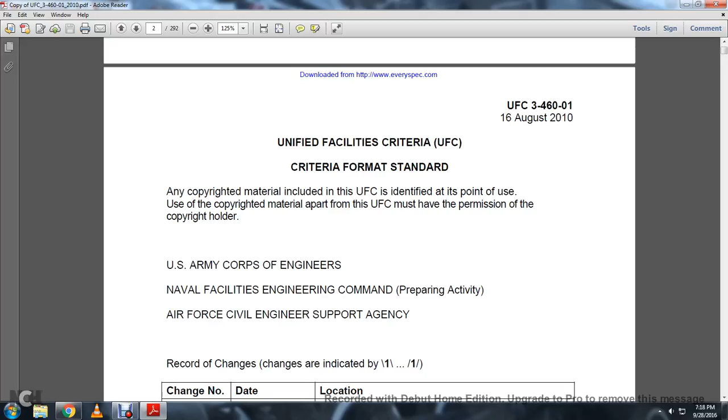Unified Facility Criteria format standards: any copyrighted material included in the UFC is identified at these points. Use of copyrighted material apart from the UFC must have permission of the copyright holder. Preparing activities include U.S. Army Corps of Engineers, Naval Facilities Engineering Command, and Air Force Civil Engineer Support Agency. Recommended changes are welcomed.

Foreword: The Unified Facility Criteria System is prescribed in Military Standard 3007. It provides planning, design, construction, sustainment, restoration, and modernization criteria, applying to the military departments and defense agencies per the DoD, in accordance with the Under Secretary of Defense Acquisition, Technology, and Logistics Memorandum dated May 29, 2002. The UFC will be used for DoD projects and other customers as appropriate.

All construction outside the United States is also governed by Status of Forces Agreements, host nation funded construction agreements, and in some instances bilateral infrastructure agreements. Therefore, the acquisition team must ensure compliance with the most stringent criteria among the UFC, the SOFA, host nation funded construction agreements, and bilateral infrastructure agreements.

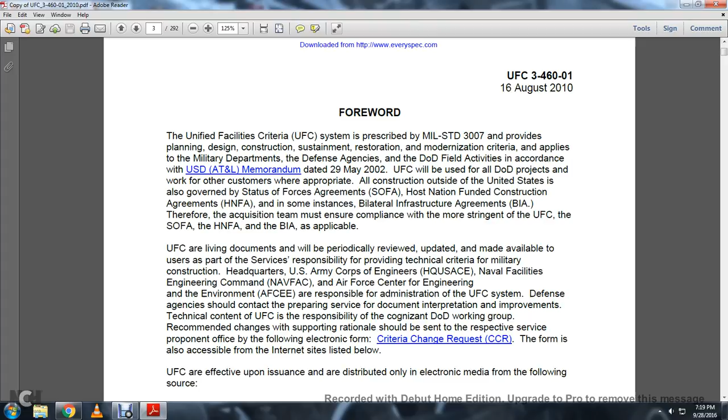The UFC are living documents that will be periodically reviewed and updated, and made available to users. Services responsible for providing technical criteria for military construction include Headquarters, U.S. Army Corps of Engineers, Naval Facilities Engineering Command, and the Air Force Center for Engineering and the Environment, which is responsible for administration of the UFC system.

Technical content of the UFC is the responsibility of the cognizant DoD working group. Recommended changes with supporting rationale should be sent to the respective service proponent office using the electronic criteria change request form, which is also accessible via internet access.

The UFC is effective upon issuance and is distributed electronically through sources including the Whole Building Design Guide, dod.wbdg.org. Hard copies or other printed electronic media should be checked against the current electronic version to ensure they are current. Signed: James Dalton, Joseph Gott, Michael McAndrew, and Dennis Firman.

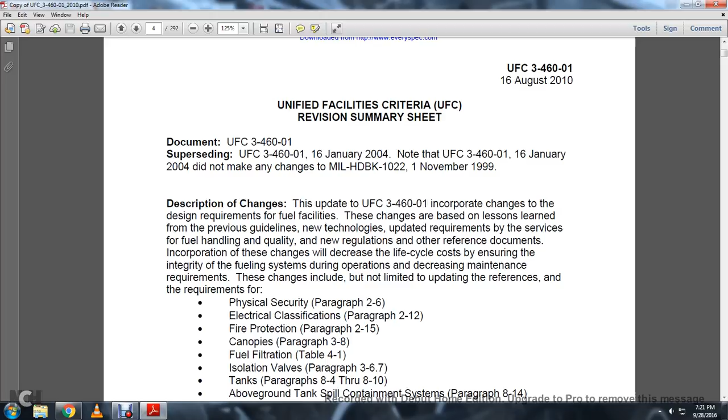These changes are based on lessons learned from previous guidelines, new technology, and updated requirements from the services for fuel handling quality, along with new regulations and other reference documentation incorporated. These changes will decrease life cycle costs, ensure the integrity of fuel systems during operation, and decrease maintenance requirements.

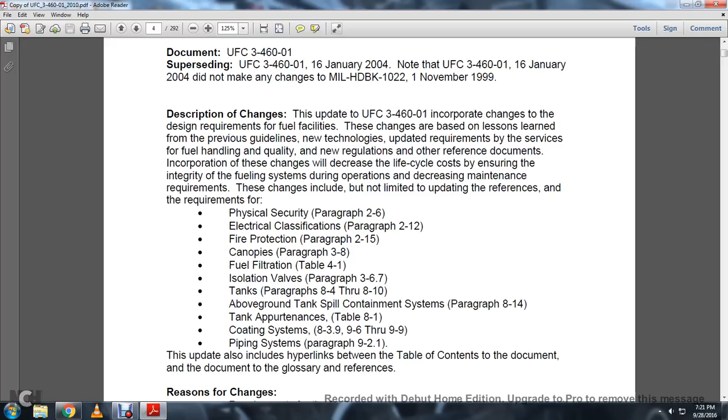These include, but are not limited to, updating references and requirements for physical security, electrical classification, fire protection, canopies, fuel filtration, isolation valves, tanks, above-ground tank spill containment systems, tank appurtenances, coating systems, and piping systems. The update also includes hyperlinks between the table of contents, the document body, and the glossary reference.

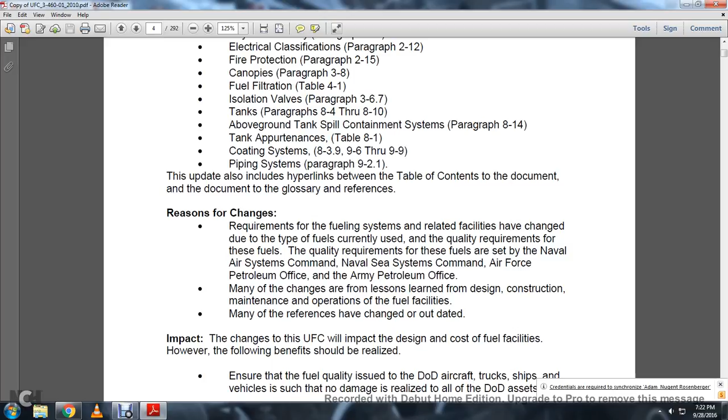Reason for requirements: requirements for fuel systems related to the facility have changed due to the fuel types currently in use and the quality requirements of these fuels. The quality requirements for these fuels are set by the Naval Air Systems Command, Naval Sea Systems Command, Air Force Petroleum Office, and Army Petroleum Office.

Many of the changes stem from lessons learned in the design, construction, maintenance, and operation of fuel facilities, as many of the references had become changed or out of date.

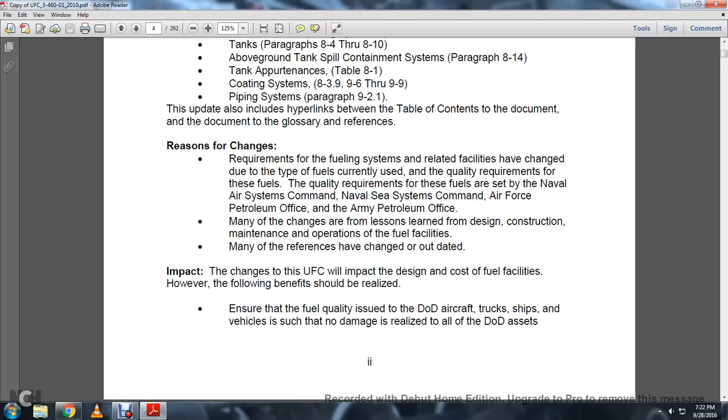Impact: The change to the Unified Facility Criteria will impact the design cost of fuel facilities. However, the following benefits should be realized: ensuring that fuel quality used by Department of Defense aircraft, trucks, ships, and vehicles is maintained, reducing damage to DoD assets.

By ensuring all fuel facilities are standardized across the tri-services, this will decrease the amount of maintenance and repair required for fuel system facilities.

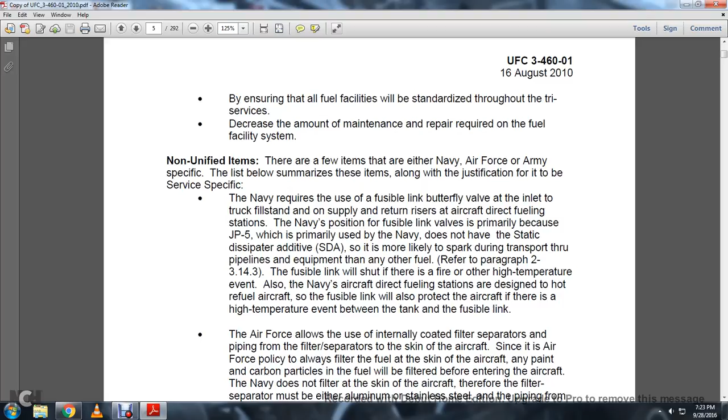Non-unified items: a few items specific to the Navy, Air Force, and Army are listed below, along with justification for why they remain service-specific.

The Navy requires the use of fusible link butterfly valves at the inlet to truck fillstands, and on supply and return risers at aircraft direct fueling stations. The Navy's position on fusible link valves is primarily because JP-5, which is predominantly used by the Navy, does not have the static dissipator additive.

This makes it more likely to spark during transportation through pipelines, equipment, and other fuel systems. Refer to paragraph 2-3.14.3. The fusible link will shut off in the event of a fire or other high temperature event. U.S. Navy aircraft direct fueling stations are designed to hot refuel aircraft, with the fusible link protecting the aircraft if there is a high temperature event between the tank and the fusible link.

The Air Force allows the use of internally coated filter separators and piping, with filter separators located close to the aircraft. Air Force policy is to always filter the fuel close to the aircraft skin, so any paint or carbon particles in the fuel are filtered before entering the aircraft. The Navy does not filter at the aircraft skin; therefore, filter separators must be either aluminum or stainless steel, with piping through the filter separator to the aircraft being stainless steel.

The UFC references service-specific documents that the Tri-Service Fuel Committee does not oversee. Each of the services has its own requirements for fuel quality and operations.

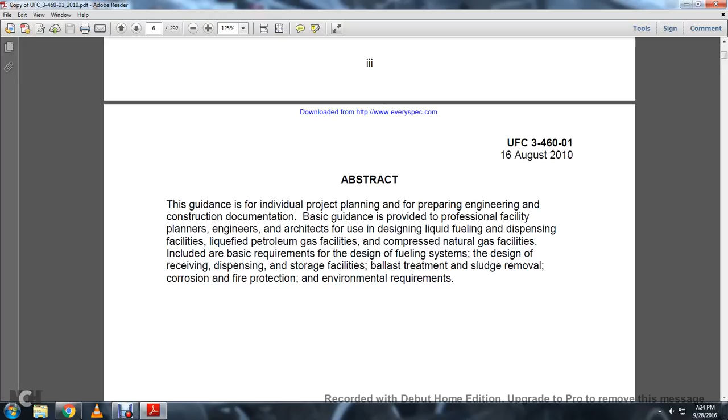Abstract: Guidance for individual project planning, engineering, and construction documentation provides basic guidance for professional facility planners, engineers, and architects for designing liquid fueling and dispensing facilities, liquefied petroleum gas facilities, and compressed natural gas facilities. This includes basic requirements for fuel system design covering receiving, dispensing, and storage facilities, ballast treatment, sludge removal, corrosion, fire protection, and environmental requirements. Table of Contents, Chapter 1, Introduction.

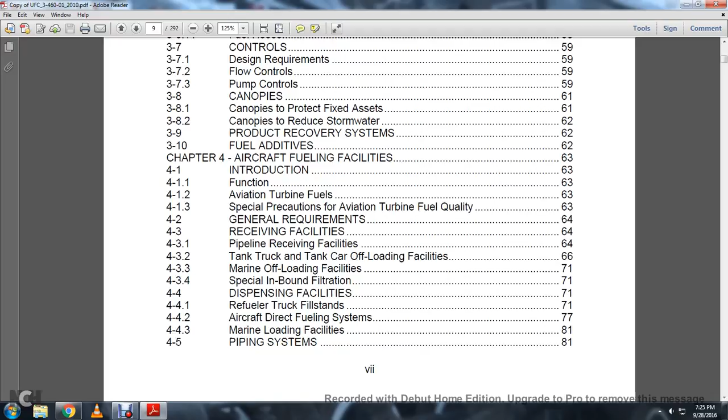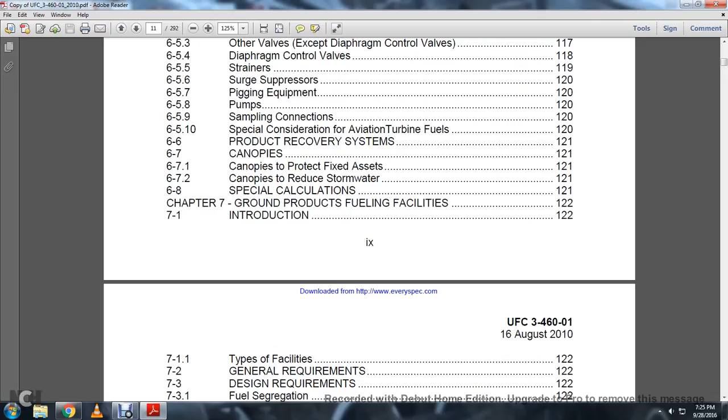Chapter 2, General Design Information. Chapter 3, Bulk Storage Facilities. Chapter 4, Aircraft Fueling Facilities. Chapter 5, Marine Receiving and Dispensing Facilities. Chapter 6, Internal Installation Pipelines. Chapter 7, Ground Product Fueling Facilities. Chapter 8, Atmospheric Storage Tanks.

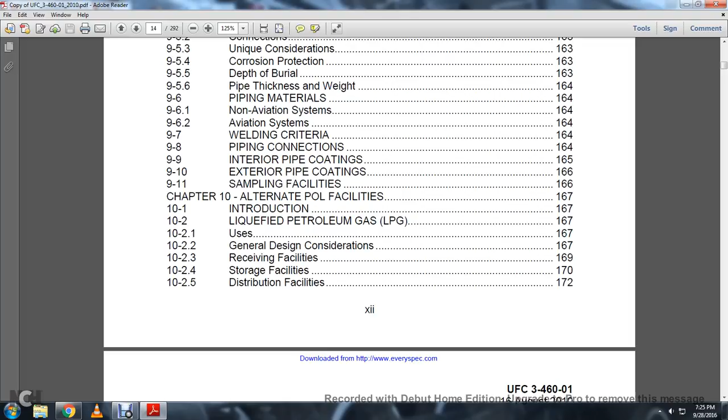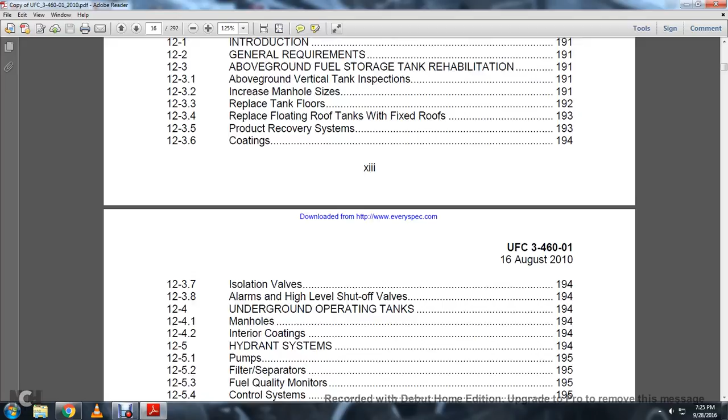Chapter 9, Piping Systems. Chapter 10, Alternate POL Petroleum Facilities. Chapter 11, Support Facilities. Chapter 12, Major Rehabilitation. Chapter 13, Fueling Facility Temporary Deactivation. Chapter 14, Fueling Facility Closure.

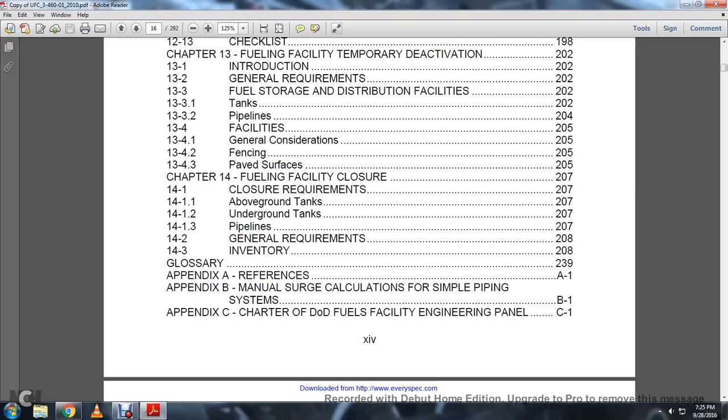Appendix A, References. Appendix B, Manual Surge Calculation for a Simple Piping System. Appendix C, Charter of the Department of Defense Fuels Facility Engineering Panel. And then a list of tables and figures. Chapter 1, Introduction.